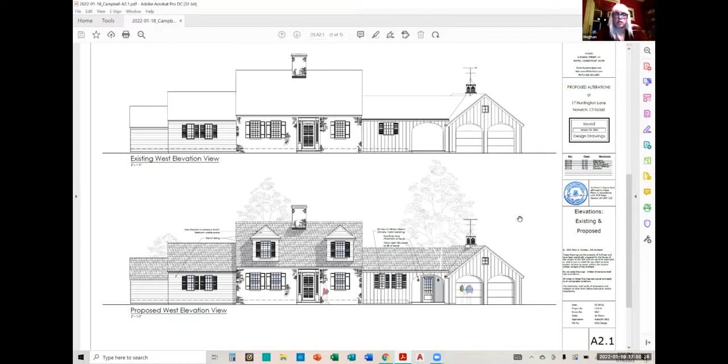There's 2 other capes already on the street that have dormers, so it would be within keeping with the same look as the other houses that are around the same age in the neighborhood. And I think that pretty much is everything in the front that we have talked about.

We haven't necessarily picked out the details of things like the windows, but obviously we would stay within what's acceptable. We currently live in the historic district, and we've replaced the windows before, so we know the deal. I think that's it.

Yeah, I think that's pretty much all for the front. Okay, great. Thanks, guys, we appreciate you both being here. Any questions from members of the commission for the 2 applicants?

I just had one question. So the door that you're showing here, you're adding a door. Isn't there already a door over there? Yeah, there is, there's an old door over there. It's going to have to get replaced. Honestly, we haven't picked out the exact design yet for it.

There's a lot of work to be done at this house, so we will have to circle back, but the current door that's there will have to go. It's a metal storm panel door that's there now. Yeah, I think I've been in that house before.

So the door, you didn't show it in the upper drawing, that's why I was kind of curious. So it's not a new door, it's just replacing the door. Just replacing, yep, exactly. Good point.

From a dormer standpoint, those dormers are a little bit wider than the three examples shown in the neighborhood, only because they would include the shutters, as I understand it. Yes, it'll be a little bit larger, and that was also driven by the rooms being very small up there, not a lot of usable room. So the shutters help broaden them a little bit.

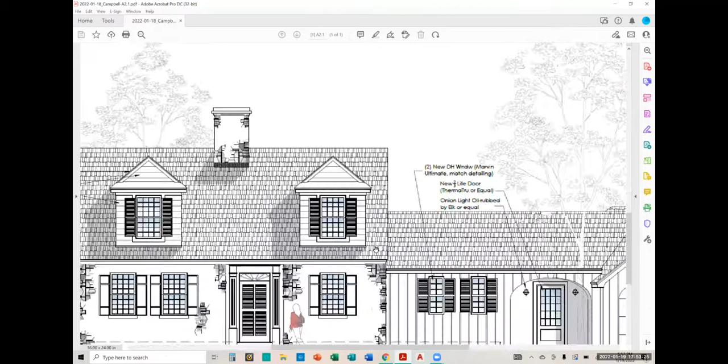These are 9/9, I think, below, is what I'm looking at. For the most part you'll be able to keep 9/9 up on top, correct? We want the same windows, we want them to look the same. Otherwise it would look strange - they need to look the exact same as the ones that are there.

But if you look at the mustard one, Judy Hamlin's, or some of the other ones, they sometimes lose one of the rows. Like on the mustard one, it was 12/12, but up above they lose one of those rows, I guess. This one won't lose that.

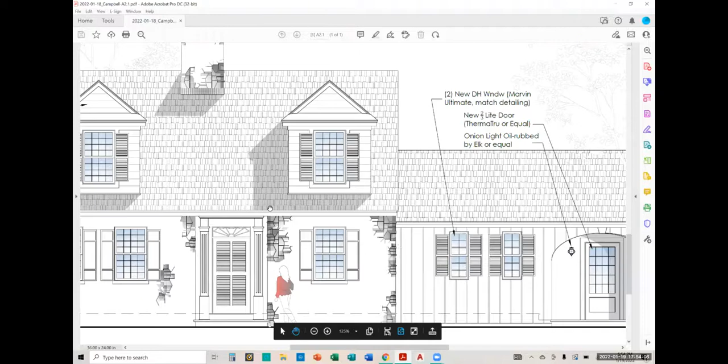Visually, I don't think that would be my ideal, right Mark? I don't think that makes sense. So I think ideally it would be better visually if they're the same windows that are currently there. There's 9/9 on the left-hand side, and then these are 16s actually.

You can see on these main windows there's 16/16. Oh no, yeah, okay - 12/12, 12/12. Okay, so we would want to match that if we could, like I said, only to get real functional space up there. I told Megan if we're going to do it, we should really make sure that in the end it's functional.

Okay, good. I didn't see that those ones were covered in the picture that came through. So 9/9 to the left, but what you said 12/12 - so whatever goes along with that would match vertically above that with the dormers.

And you can't really see it from the photo, but along the top part there's nice dentil molding. So we're hoping to reflect some of those same details that you see in the house currently. So to me, when we're done, the dormers will look like they've always been there, as opposed to sticking on after the fact.

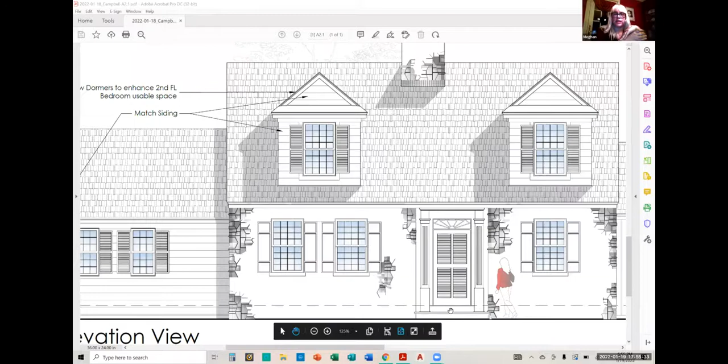I was going to say, the mustard one has a little bit more detail and fanciness in the dormers themselves, where the other two are not as - I want to repeat it - along the stone section there, that top piece across the door, across those windows, there's a really pretty little piece of dentil molding. So I think that we'll probably sort of repeat that look.

I'm a designer, so between Mark and I, details are important. So little things like that will sort of mimic the look of the rest of the house, because the house has a very storybook little look to it. I kind of want to keep it picturesque, so anything we put there needs to blend and look like it was part of the house from the get-go.

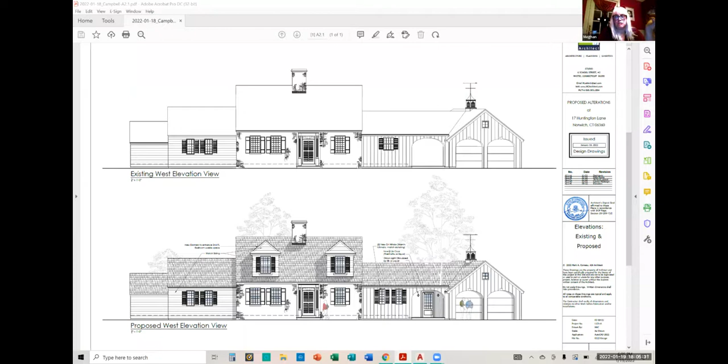The only portion you'd technically see from the public side is what will essentially look like part of the garage—just a few extra feet in the back of the garage that you would even be able to see. The rest of it you'll see on the plans; it actually goes into what's currently sort of a nook within the house, so you wouldn't see most of it from the road. The only thing you'd really see is if you're coming around the corner, you'd see the side, what would look like basically an extension of the garage. Not that anyone would know—once it's on, it would just look like the garage.

I'm looking for that drawing. Hold on a second. I think I'll just open the CAD—it'll be easier. So Megan, in the application, you have a floor plan shown.

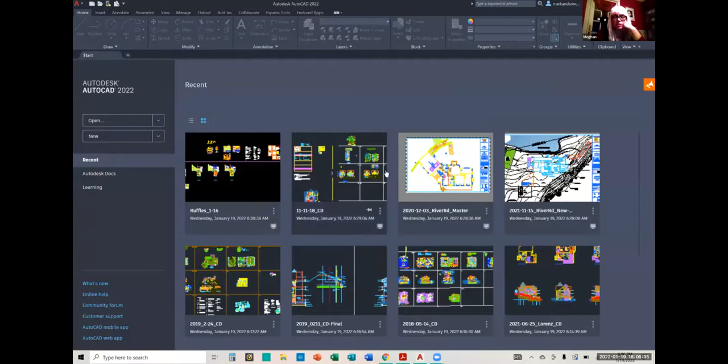Which is the new part on there—the piece that wraps behind the garage and the mudroom? Correct. Mark's going to pull it up so we can talk to it. The kitchen is tiny, so it'll be an extension of the kitchen.

The reason we're extending it behind the garage is that currently the laundry is in the basement, and we bought this house for my mom so she could live on one floor, so I need to get the laundry upstairs. This is how it currently looks back there—this is the tiny little kitchen and half bath.

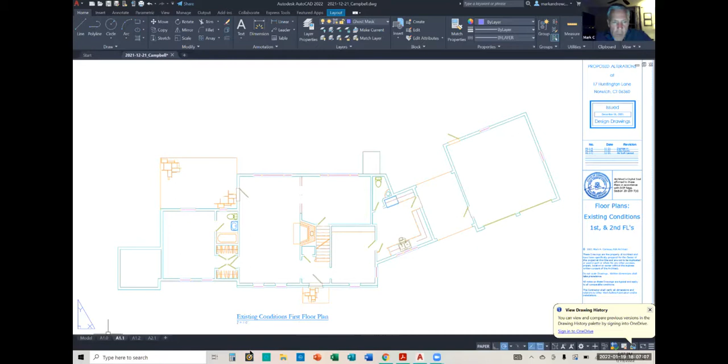I can walk you through it—can you see this okay? Yeah, let me see it. Or is the black easier?

I don't have a preference. I see it both either way. So either way is good.

Okay, so the front of the house is here where my cursor is. This is the stone facade. Right now this is a very small kitchen with a very small half bath off of it here, and kind of a clumsy interchange that happens here with quite a bit of mud room, and then you go out into the backyard.

So our proposal is to expand this in the back a little bit, redo the mudroom, and create a wine bar breakfast area right here. We'll open up this wall into the front room to allow for more free flow of circulation.

There's a back buffet built into the dining room, which it sorely needs right now. And then we'll expand the kitchen out into this area beyond the garage, and wrap it around the back of the garage to include a new powder room with a pantry and a laundry.

So that's the line of the original back of the garage. We're adding on to this and coming back over like that, and that roof will probably just shed back, no gables, just a shed back to the rest of the structure.

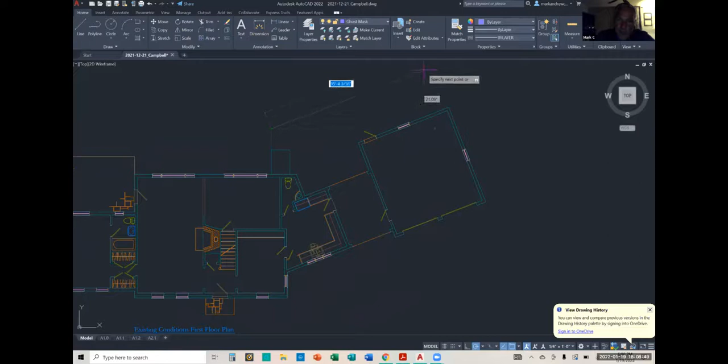So again, that's the existing. And what we are doing is basically coming out and going over and coming back like that, and then up.

Okay. And the only part that you'll potentially see from the road would be where that laundry room is. That back piece of the rest of it, you would not see from the road.

Which would be essentially a typical carriage shed coming off of the gable that's there now. They used to have those on the back of garages centuries ago to cover firewood. So I would probably try to make it look like something utilitarian like that, even though it's cloaking a laundry room.

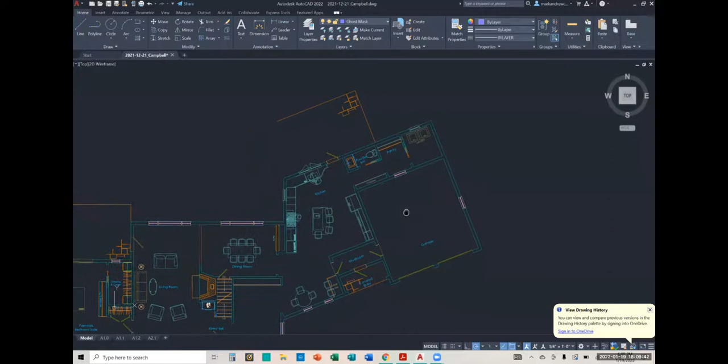So that front entryway, that changes a little bit somehow, other than just the door. You're saying you're doing a different window treatment to the left of that entryway, and then... Right.

So currently there's a wall back here with a screen, a Home Depot metal screen door, and you come into it and go into the kitchen, and there's a window here over the sink. So what we'll be doing is pulling that wall out a little forward, putting a nicer door in, and creating an airlock, a mud room.

Because it's going to be so traffic ridden, we wouldn't want the door to open up and today's cold to go into the kitchen area. So you'll go from the garage through the mudroom, or through the covered entry into the mudroom, and into this space here, and then into the renovated kitchen like that.

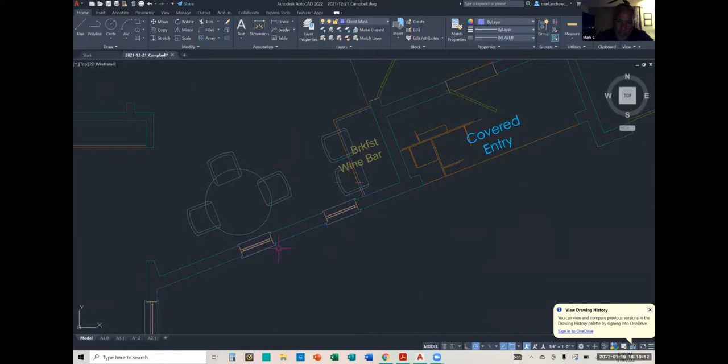And we're replacing the one larger window that was over the kitchen sink with two smaller windows that keep more in scale with what's going on all the way to the left of the house over here. Yeah, I think it's a symmetry thing. Yeah, better balance to do that, I think. Yeah.

So you wouldn't really see that wall, the outer wall of the mud room, moving closer to the front at all necessarily, because that's kind of undercover right now, or behind a screen? That's correct. Yeah, you won't really notice anything from the front of the house, other than the windows, of course. But past that, you would not notice anything.

Did you happen to have a proposed window for those two that you're replacing the single window with? Either way works, I'm very interchangeable, because my contacts at both Andersen and Marvin know that most of my work is in historic districts. They've got 3 different muntins that we design with, so we'd take a look at what's there and try to match up to the muntin we have most. The Marvin Ultimate Series, though, is the one I find to be the top performer.

Okay, thank you. You're welcome.

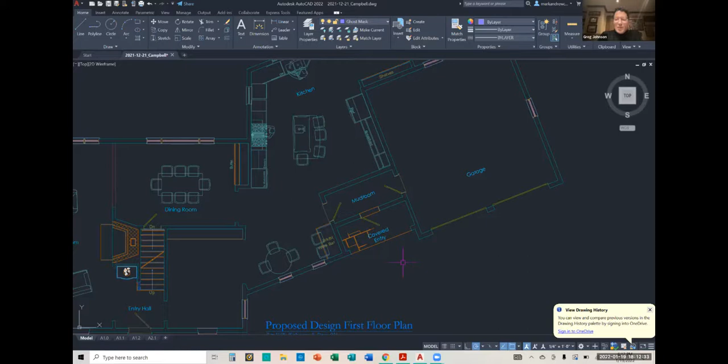I mean, the new bathroom doesn't seem that much bigger than the current bathroom. It actually is a lot bigger, because I think we're gaining almost 9 feet coming back off of there. So, yeah, right now, part of my thinking is as my mother gets older, in case she has issues and is ever in a wheelchair, the current bathroom, she would never be able to even get through the door. The new one she would. So that was part of the thought process too, just the functionality as you get older.

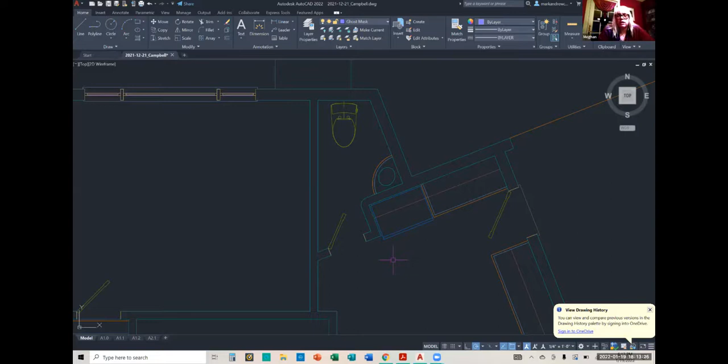That's important, so yeah, it's bigger. It's not going to be huge because it's just a half bath, but it'll be a better shape. Right now it has this tiny little half circle sink in there, and it'll have a regular vanity, just slightly large enough for a half bath without being crazy, but at least it'll allow for a more functional space too. Better access. Better access for sure. Yeah.

Nancy, you've been very quiet. Do you have any questions? I don't mean to call on you, but I just want to make sure you're all set.

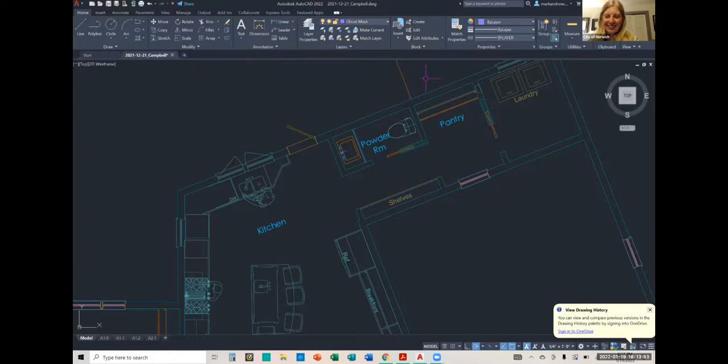Oh, I think you're muted, Nancy. We still can't hear you. I'm sorry, I shouldn't have called on you. There we go, now you're good. Yep, no questions. Thank you, though, Reagan. Okay, great.

Who's barking? I heard a little dog barking someplace. Yeah, whose dog is that? That would be mine, Brian. He's a schnauzer and a barker. Knock it off, Cash.

So does anyone have any further questions for Megan and Mark? Just to confirm, that's a 9-foot bump out in the back, correct? Behind the garage, yes. The bump out is obviously further from the back of the house because it's kind of nooked in there, but yes.

All right, so anything for Mark or Megan you want to add at this point? I think we're good. Okay, great, I appreciate your time. Yeah, thank you very much.

Appreciate it, Regan, but before we close it though, we know that the door has to be another COA. We can approve this even though there'll be some sort of entryway, but we don't have... I don't want to get ahead of myself. We could approve this and then deal with the door later on, correct? Yeah, we can do that. Yeah, that's not a problem.